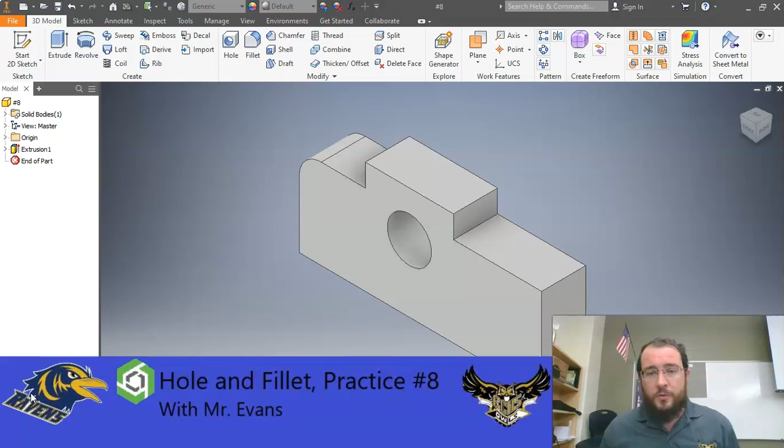This one will include a hole and a rounded edge two different features that I haven't shown you yet. This is Autodesk Inventor, what I'm used to using.

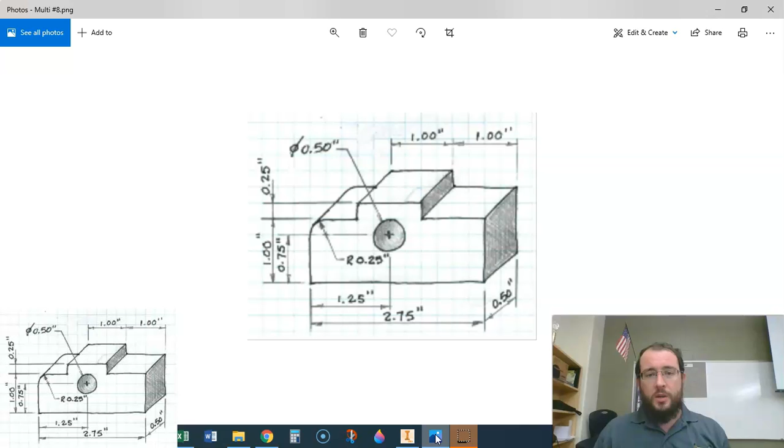And as you can see, I did it in one move. Let me open up what it looks like for dimensions. I'll put this in the corner over there, just so it can be on the side so you can see the dimensions as you work it out.

So let's move on to Onshape. Got to sign in first.

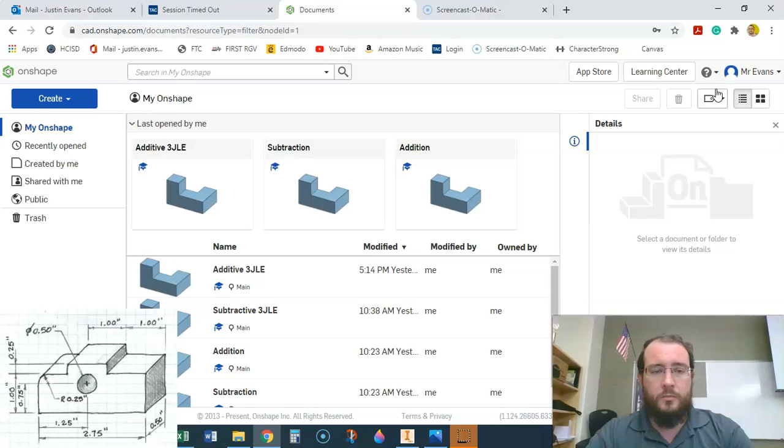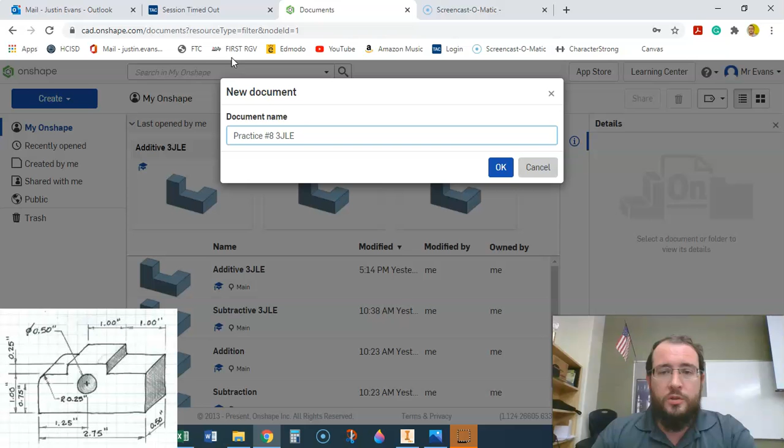All right, so we will create a new document and we're going to call this one practice number 8. We actually did this one as a multi-view sketch of like top, front, right months ago. But we're going to call it practice number 8, and then you're going to put your class period and then put your initials. Of course, don't put mine. So yours should look just like this, except you'll have a different class period and different initials. So practice number 8, and let's move forward from there.

So I'm going to start off with a sketch. Now you can approach this in many different ways. Let me actually go back to this right here. One thing you could do is you could go the subtractive method, and you can do a large box and you could cut out the corners, and then you could make a hole, and then you could round out this edge. That would be one option. That would be 1, 2, 3, 4, 5 steps.

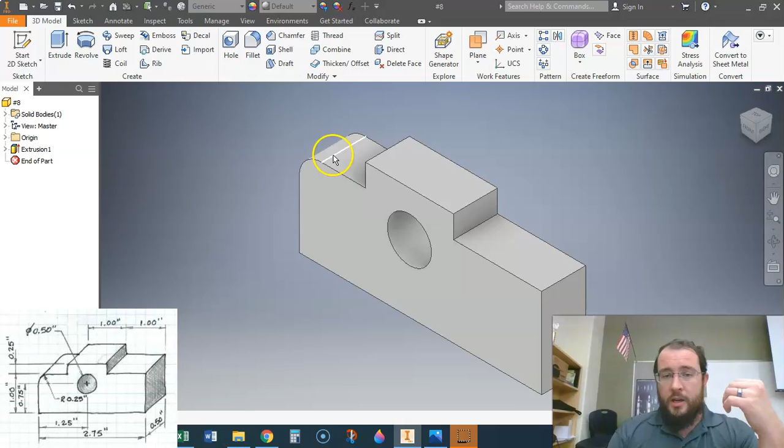You could make a box and then protrude this top, round the edge, and make the hole. That would be 4 steps. What I'm going to do is I'm going to try to do it all in one step.

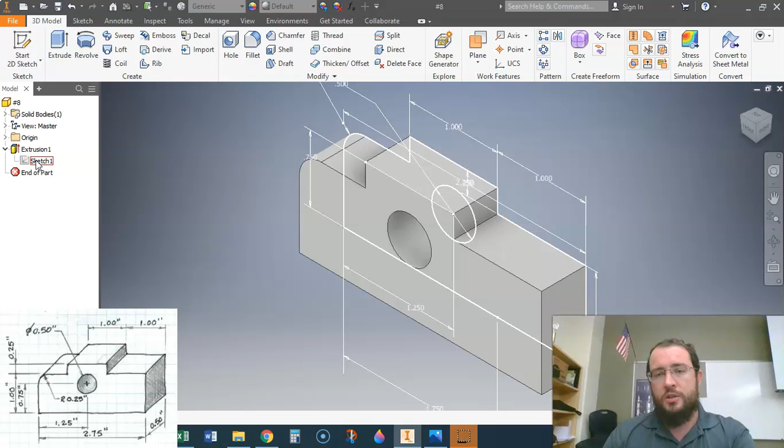Actually, maybe I'll break it down into 3 steps. You can do it all in one step, but I think for this video, I'm going to at least break it down into 3 steps to make it easy. If you were to break it down into one step, it would be like this. You would put everything on the sketch, including the rounded edge, all at the beginning. But because we're learning, I'm going to do it in at least 3 steps right now.

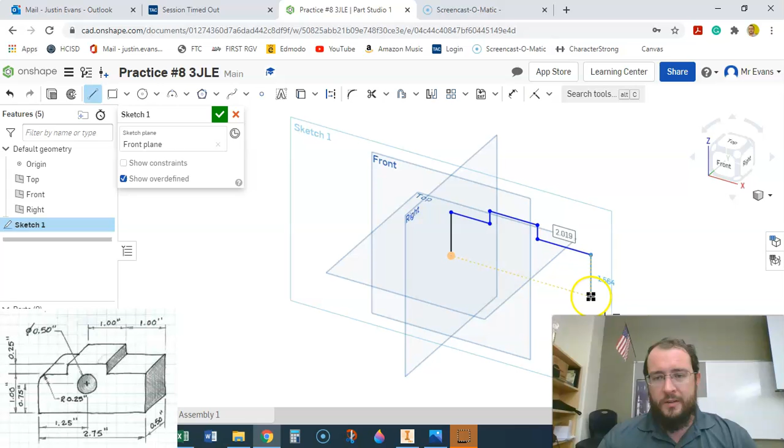So I'm going to start a sketch from the front view. So I'm going to click front, and I'm going to grab the line tool. And I'm just going to click on the center just to make it easy. And I'm going to go up, over, down, over. And if it helps, you can click it from the front to make sure that everything is lined up.

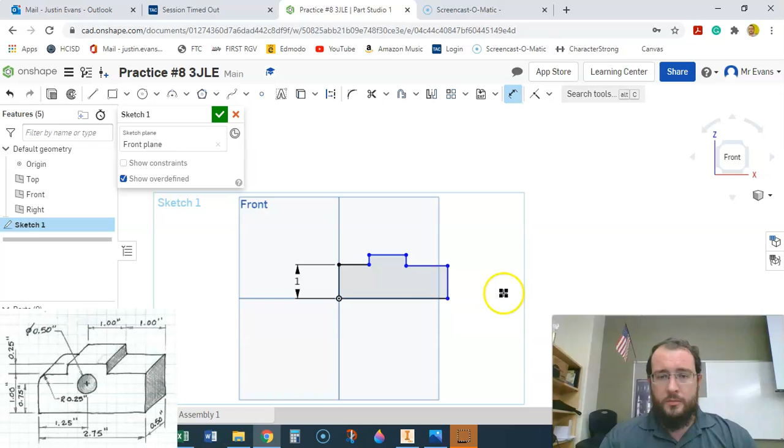So we have that line, and I'm going to come and put in my dimensions. So let me see. I've got here, it is 1 inch tall, and here it's also 1 inch tall. So I need to make sure that both sides are the same. And this is 2.75, 2.75.

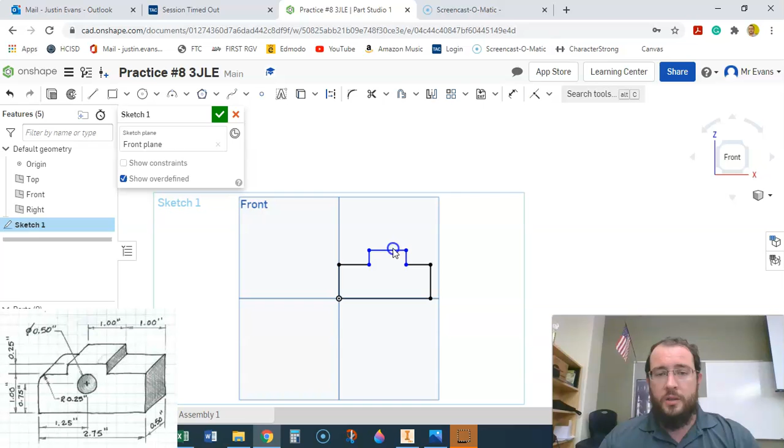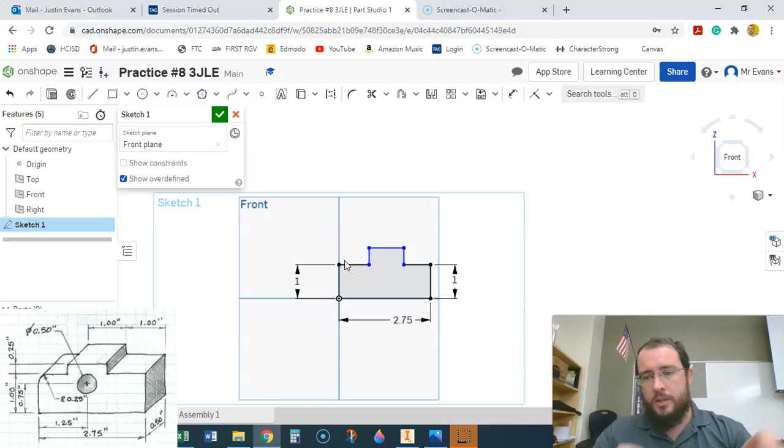Now, if it moves around weird, let me hit escape. Anything that you haven't put a dimension on, you can actually move. So like, let's say you typed in 2.75 and it did that. You can just easily hit escape on your keyboard and then move it back over and put it in the right place. Another way that maybe you can control it is you're drawing it, try to make it the dimensions that you see at the end close, and then just add the dimensions at last.

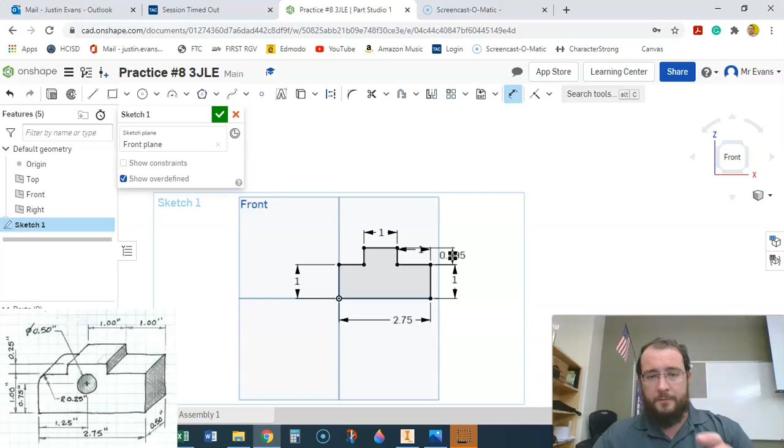So I'm going to click dimension, click the top line, make this one 1, this one 1, and this one 0.25. Now notice it's not symmetrical. It's not 3 inches across, it's 2.75, which means this is 1 inch, this is 1 inch, and this is 0.75. I don't need to put it because it can make those subtractions.

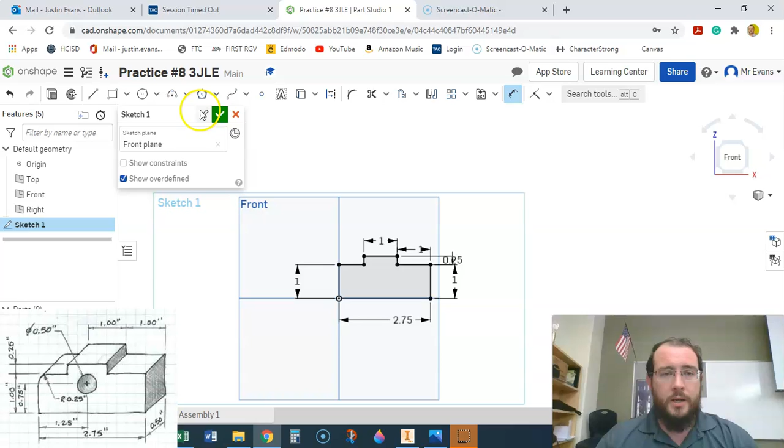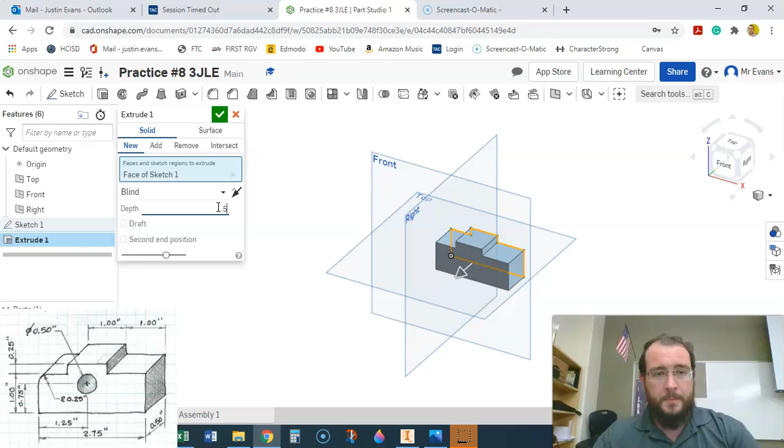So we've got the overall done. I'm going to hit the check mark. I'm going to rotate it, and I'm going to extrude it. So let me select the piece, and it's going to extrude forward 1 inch, but if you look at the dimensions, it's half an inch. And press enter. There we go.

Now I'm going to want to put a hole going through the thing. So I'm going to click Sketch, click on the surface. I'm going to click on the front so I'm zoomed into it.

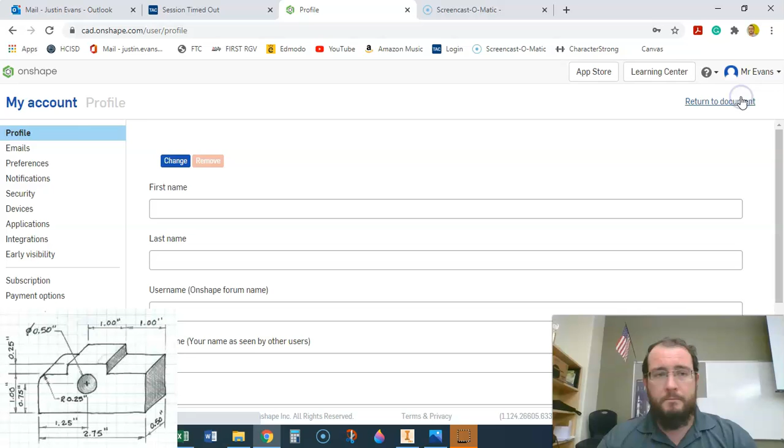We should probably look for where a zoom button is. If you click on that and then so if you click on the corner part, action items, and then you click on preferences and you scroll down, we're not changing anything, we're just looking. It will tell you in the second grouping down, mouse controls, but what does what? So if I click the right mouse button and drag, it will rotate the part. If I want to zoom, I have to use the scroll wheel in and out.

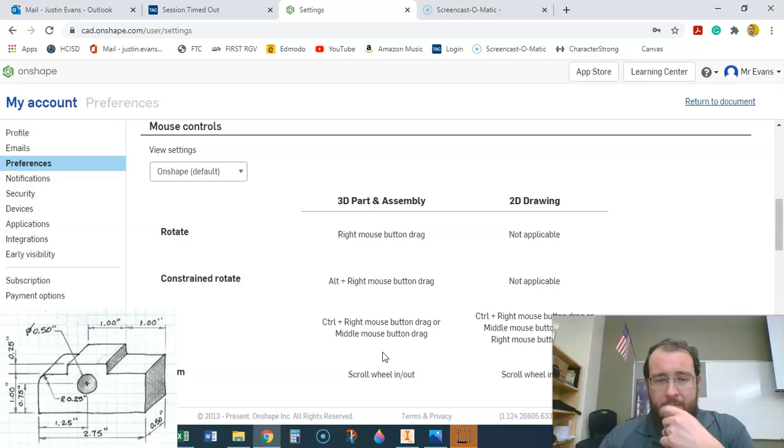Oh, I don't have a scroll wheel on a laptop. I'm not sure how to do that on a laptop. Well, that doesn't help.

Oh, I am using the arrow keys. As I'm pressing the arrow keys on my laptop, it should be the same for your iPad because I've seen other students do it. It does allow you to kind of rotate around. That might be better since we don't have actual mice. Anyways, you don't have a mouse to use. Now I don't know how to do zoom in and out, which I'm gonna have to figure out. We'll figure that out for a later date. Anyways, let me get back to what I wanted to do.

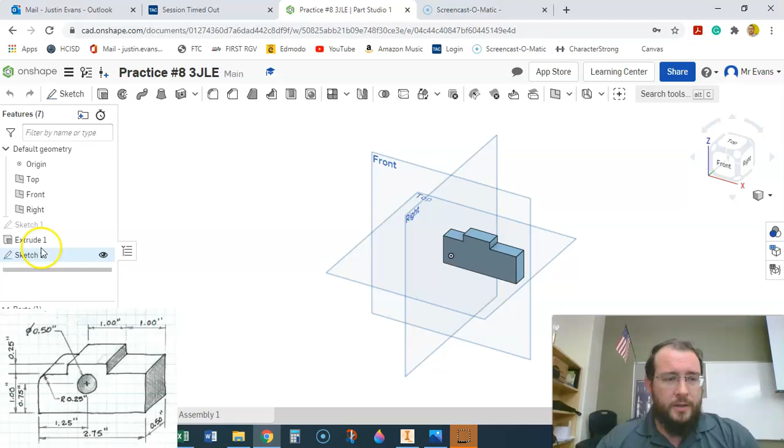So I double click Sketch 2 to reopen it. You got to really pay attention to what's on the side here so that you're inside of the correct thing. Like just because I want to draw on the front, I have to go inside of a sketch to do that. I can't edit it any other way.

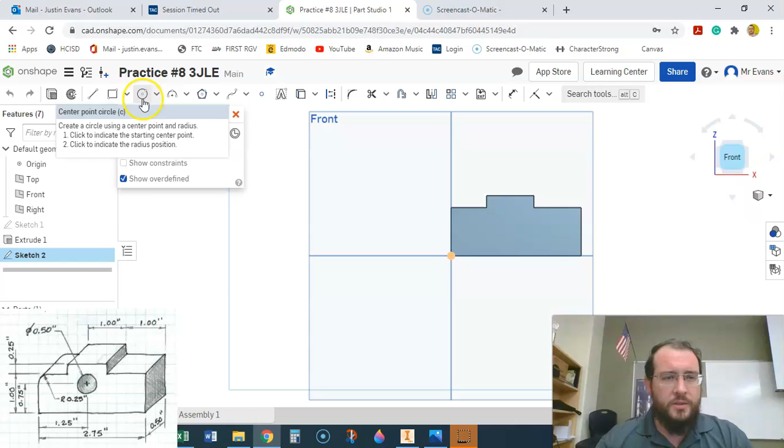So there is a circle tool here. I want to make sure it says center point circle. I see there's other options, but we're going to do center point circle. And I'm going to click, and click. See how it has a number? So the number I need is 0.5.

All right, and then now, of course, if you don't have that, you could just use the dimension tool. Now, everything I've given you so far have been size dimensions. Well, now I need a location dimension. It's half an inch in diameter, but where is it located on there? So I need 2 location dimensions, how high it is from the bottom and how far it is over left and right.

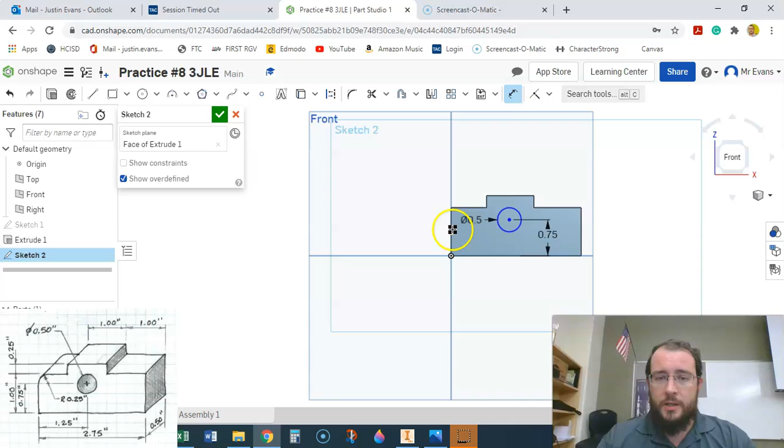So how high it is from the bottom, I just clicked on the bottom line and then the center point. And that is 0.75, enter. And then I'm going to click on the edge here, over, and that is 1.25.

There we go. I'm going to pause the video and I'm going to find out how to zoom in and out.

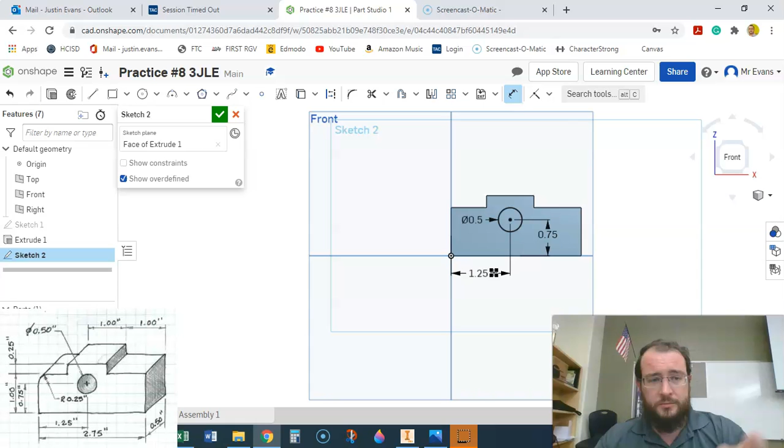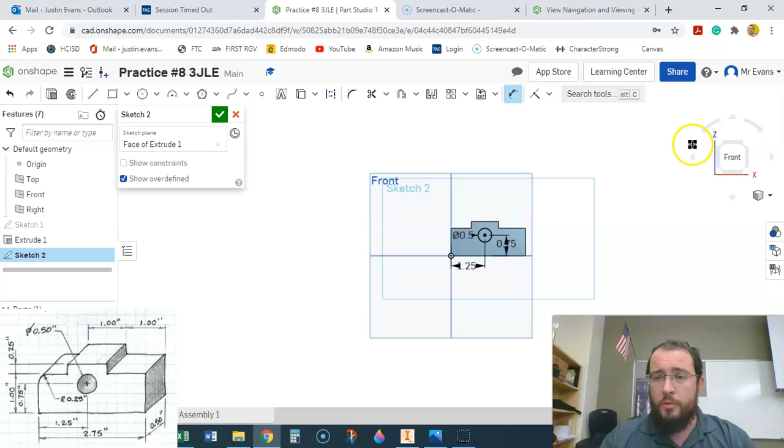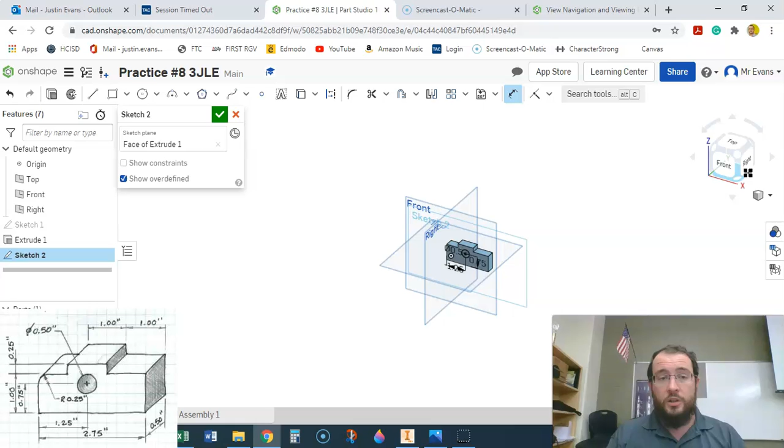All right, so I just typed in zoom Onshape without mouse, and this is the first thing to come up, and it shows a lot of navigation that can be done on Onshape. It's Onshape's website, and I read a few things. To zoom in and out, it says to move your fingers in and out if you're on an iPad, or if you want to rotate, you can just click somewhere on the side and drag around to move it around. You can always use the view cube to return to where you want to be, clicking on some corners until you see front, top, right, so you can orient yourself. To zoom in and out on a keyboard, I saw to do Z or Shift Z goes in, Z goes out. So to see how easy it is to learn this stuff, when you are stuck, you can look it up and share it if you'd like.

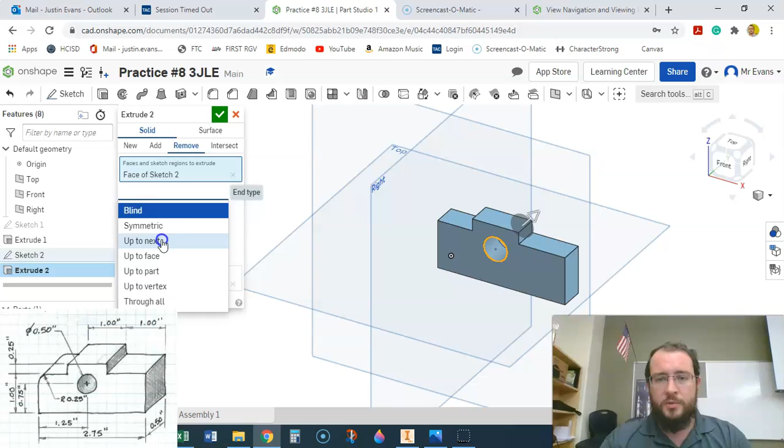All right, so now that we've got that figured out, now I'm going to extrude that hole. It's going to want to come out, but I'm going to tell it remove, and I'm going to tell it not blind, but up to next, which would be the back there.

The last part is to put a rounded edge, and I haven't even tried that yet, but I do see the rounded edge button here. It's called Fillet, not a fillet, that's like a fish thing, you know, so it's called a fillet. It's actually a reference to welding, they fill in the space. So usually they're just called rounds also when they're on the outside, a rounded edge, but fillet.

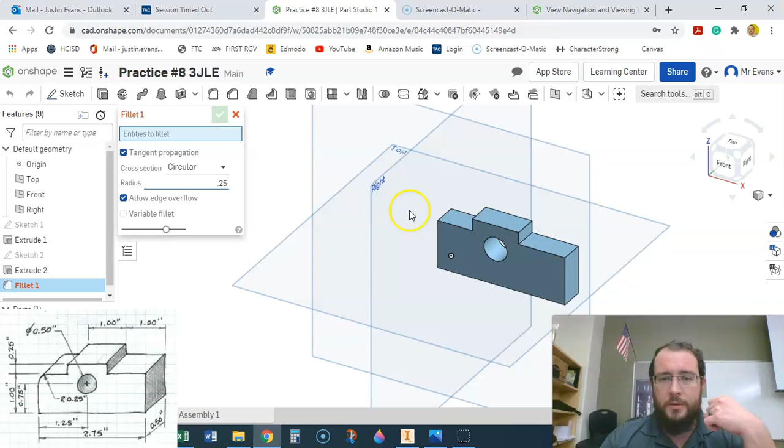So I see we have a place for a radius that's 0.25 according to the thing. And then I'm just going to click this edge, and I'm assuming it's going to do it for me. Yeah, looks good. And then I hit OK. So there's my part completed and done.

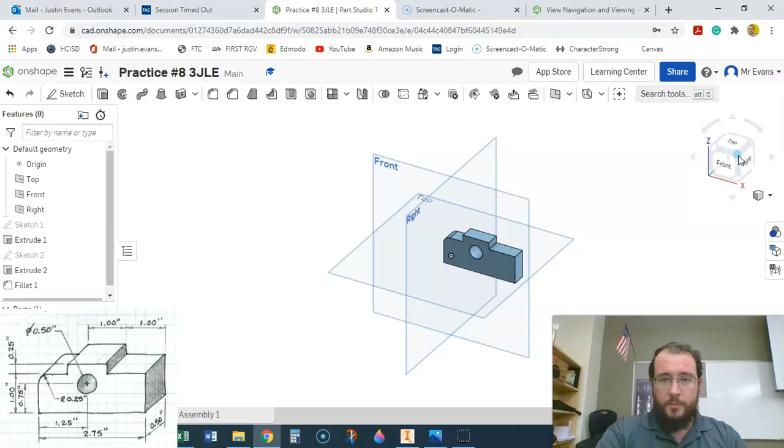Go ahead and upload a picture just like this. If you click right here, it should put it in, maybe we could zoom in a little bit more. Oh, wrong way, I'm going to zoom it in closer. So take a screenshot like this where you can see the parts tree on the side. We did this in 2 extrudes and 1 fillet. And it says practice number 8 with the period and initials.

Now, if you want to try and do it in less, feel free. If you want to do it in a subtractive method separate from what I did, feel free to explore it. So if you have a different amount of extrudes and fillets, feel free to make a comment. I tried it out on my own separate from the way you did it just to practice, and that'd be fine.